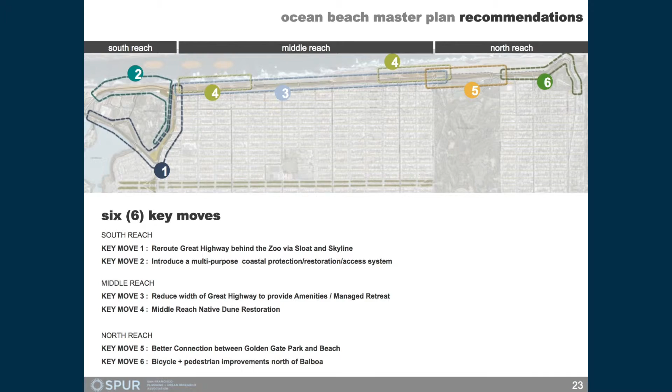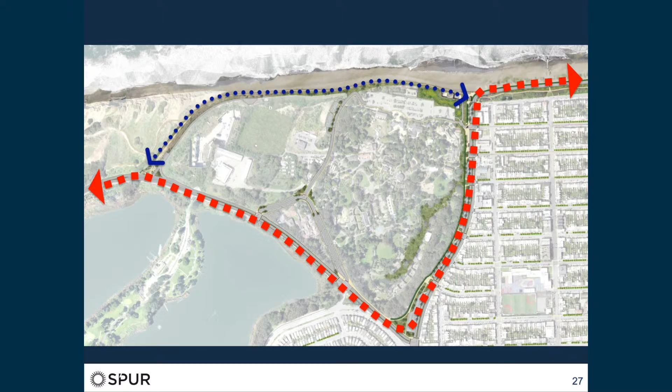And in exchange for that, we pick up the opportunity to take a much more flexible approach to managing the erosion challenge with more space and fewer constraints on how we do it. And we also pick up the opportunity for a spectacular roadless coastal trail and coastal open space experience.

So everybody loses something, everybody gains something. And in taking a more effective and low-profile approach to protecting the infrastructure that's there, we allow coastal access, we allow habitat values to work, and we create a spectacular amenity in an area that is now sort of a poor cousin of Ocean Beach. Frankly, people don't go there unless they're surfing the break down there, and those are the passionate users.

And we can also provide more of the habitat for the snowy plover and for the bank swallow, which are the two threatened birds on this beach. So just to walk you through this sort of adaptive program, remember this idea of adaptation being this long-term, incremental, stepwise action rather than just simply one big, shiny project.

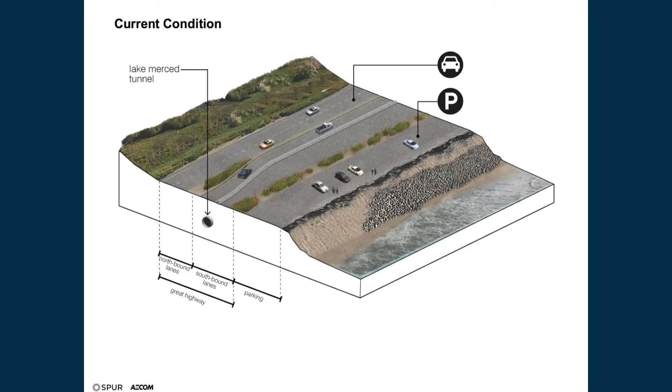This is the current condition, basically kind of a leftover of what was a parking lot built on fill and a roadbed built on fill when the Clean Water Program was built. This shows what we can do without changing anything about the road, but reconfiguring the parking away from the eroding bluff and providing a clear pedestrian access along the oceanfront.

This is what we're calling phase one, which is likely to happen late next year, narrowing the road from 4 lanes to 2 using funds that were aimed at storm damage recovery from the 2010 storms. Originally they were going to try to replace the road in kind, but this allows them to create this interim condition. By then narrowing the road, you free up today's southbound lanes for the introduction of a coastal bike and pedestrian trail, as well as revegetation with native plants south of Sloat Boulevard.

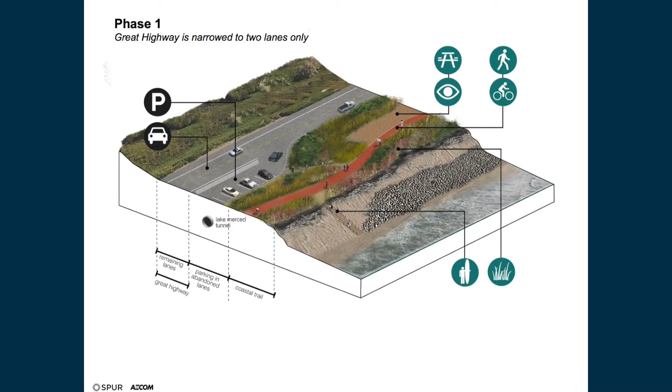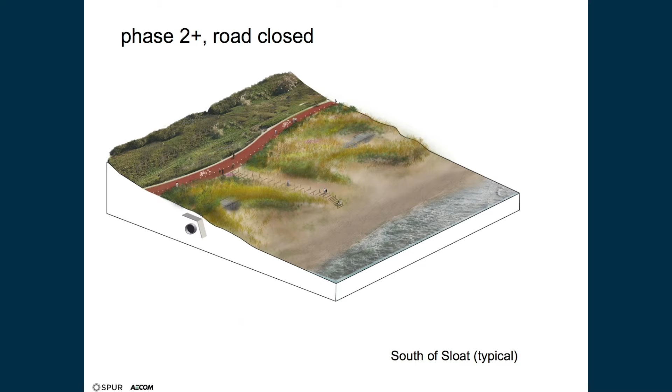This is all with the existing revetments still in place, all with the Lake Merced Tunnel. You can see down underneath the road there, note how big that is. You can stand 2 people up in it. It's huge. And then finally, with the road fully closed and the installation of a subsurface protective structure around that pipe, as close to the pipe and as low in space as you can get, so you can have that much more laid back shoreline profile. You allow wave energy to dissipate over a long period, over a long distance, rather than hitting a large vertical wall.

Then you can restore the surface and provide a really first-class open space experience, with the understanding that storm surges will come over that pipe. That's the design charge there. And we will need to do periodic beach nourishment if we want to maintain a sandy beach in that area. But if we have our eyes wide open about what's possible, we can protect that pipe, get a lot more use out of its useful life, protect coastal water quality, but have a beautiful open space as well.

So I'm just going to show you a couple images from our subsequent studies. We finished the master plan in 2012, and then we engaged 3 different technical studies to kind of prove out the concepts and develop the engineering in coastal management, in transportation, and in open space and planning. And I won't dwell on this. I'll just show you some quick images.

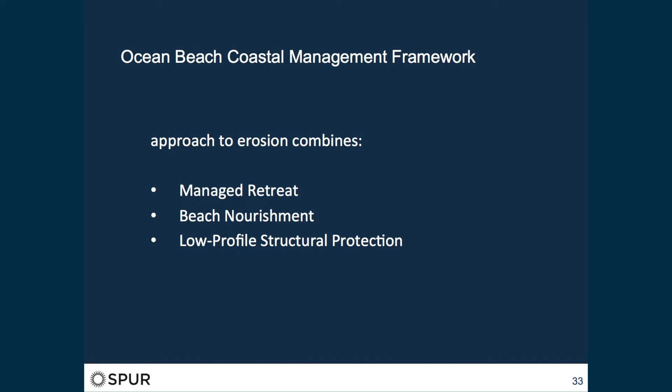Very importantly, the approach to coastal erosion, the way we sort of communicate with the public about this is, instead of are you for retreat or are you for armoring, it's no, there's a toolkit of 3 major tools and we need to use all of them. It has to be a yes and plan, not an either or plan. Managed retreat, do the closure of the parking lots and the road. Beach nourishment, using that available clean sediment that's being dredged from the main shipping channel. And low profile structural protection, all working together with multiple objectives in mind.

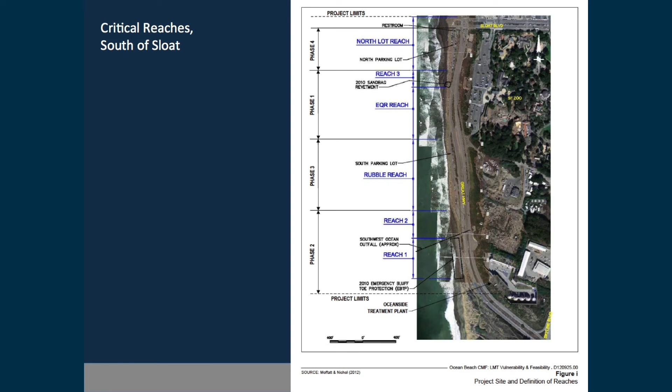You're not just protecting a piece of infrastructure, you're also providing an open space. You're not just rerouting the traffic and making sure you have the capacity, you're making better streets and better places for the zoo, for the local businesses, for the local community members. So with that yes and plan in mind, we did a detailed analysis of the hazards, and I won't bore you with that. We determined that we could get much, much closer to the pipe than we had initially anticipated, which means we can create that low profile structure. The pipe is basically at beach level, which means that it can be that kind of speed bump that we envision and have a safe protected structure around it.

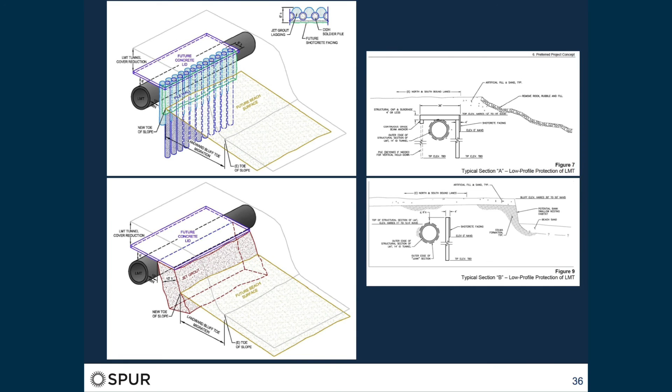And a good model for this, if you're familiar with Ocean Beach, is the Taraval seawall, built in the 1940s just north of Sloat Boulevard. It's basically at beach level too, although in erosive winters, low beach conditions, more of it becomes exposed. It does its job, and then when the beach recovers, it's actually invisible most of the time.